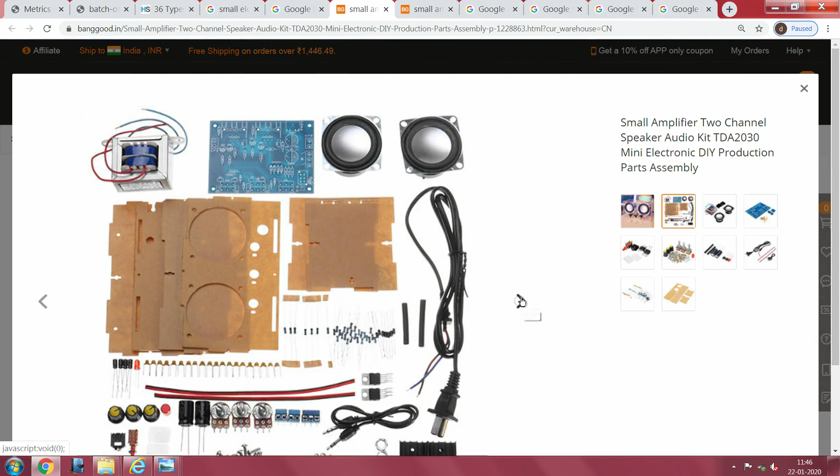The common thing about them is that invariably you will have some sort of rotary controls, and this probably is just a switch, and then you have some other types of outputs. At one extreme you can have loudspeakers. So, typically, many of what we thought was a fairly easy, simple thing, small equipment does have all these things.

You see that most important here is we have these 3 rotary controls. This is what I kept on referring to as those things which we need on the front panel. So, if you go to any design and the way the front panels are organized, which is called control panel organization, a lot of stress is given on how to arrange these components.

Now, look back again, this is the electromechanical part which you need to include in all our endeavors, and these are the visible things outside. Can you see here? We have these 3 potentiometers outside, and you will notice that except for a very small amount of electronic components, you have a printed wiring board, then a few other things, and other things are borderline mechanical items.

And whether you like it or not, there is a large number of fastening devices here. These fasteners hold together various things here. Then these fasteners are the ones that will take the control elements to be fixed properly. And then we have borderline things, an input output device which is related to this. Then we have an on off switch. Then you see here, all these things are actually mechanically fabricated.

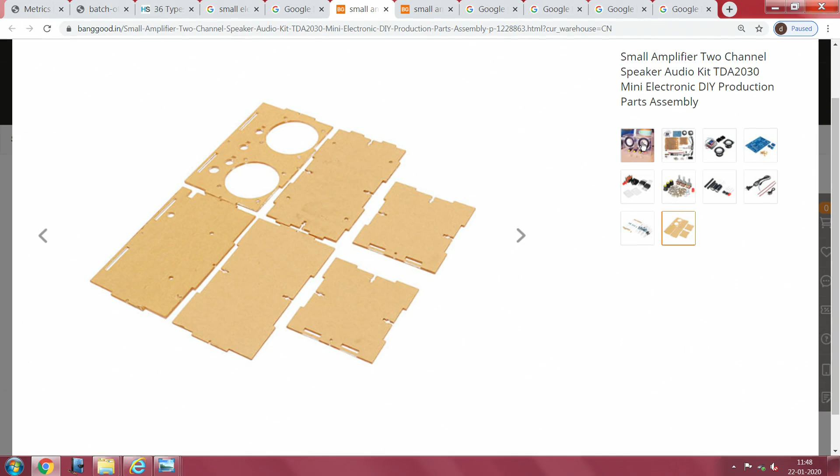So, if I now go to this, I am sure you know what it is. It is nothing but an acrylic sheet that has probably been cut using a laser. The advantage of using a laser cutting device is you have to make a proper drawing once, and you can always scale them up, and the way these parts interact. If you see my final drawing again, everything goes and intersects into the other one here. Because the sheets are thick and to make things affordable, they have added a large set of fastening devices here.

So, if you go to this picture, you will probably see all the devices that require openings and special types of things for you to include in your drawing. You have seen this? This is not fully mechanical, neither is it electronic. It is that small thing between those two which will make product detailing and implementation. Even for product design, there are several industrial design websites which will give you the outside form, and they even give you a simple exploded view.

But then when you actually want to fabricate it, you will end up with a large set of fasteners and various things which need to be assembled, and then you even have a small switch here which is not easy. You see here, this is the on off switch I was trying to tell you. The previous thing, the small red button, goes here.

And here is where you need to take a proper call, and how it goes on a PCB. You have seen this. This is the printed circuit board. One of the first things you will notice on the printed circuit board is there is a mask here. Loosely it is called a silk screen mask, and outlines of all the devices which need to be fixed are all kept there. So, when you go here, you will know where this goes. This 3-pin device probably goes here.

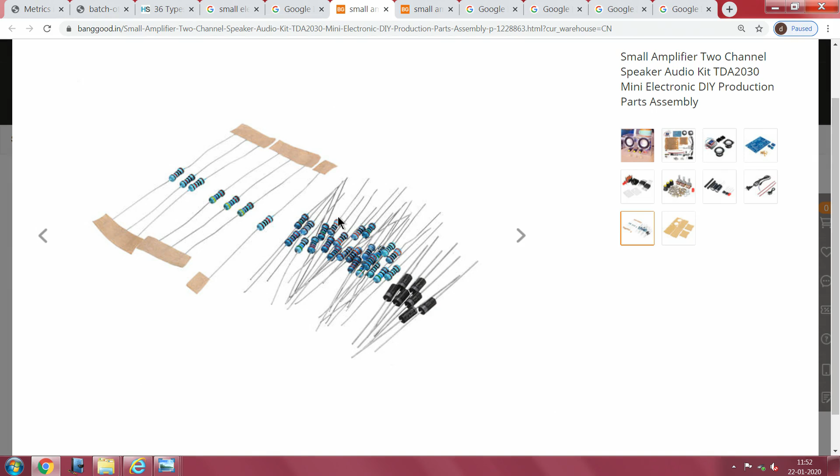Now, intentionally I have picked an older thing, so that you can see this is called lead-in-hole, old technology as compared to surface mount. Surface mount usually involves a slightly different thing and not at the hobby level. In the case of surface mount, things come in a very large level. And now, you see these interesting things, these are bulky, heavy, and they require special attention. In this case, these two things are related to this.

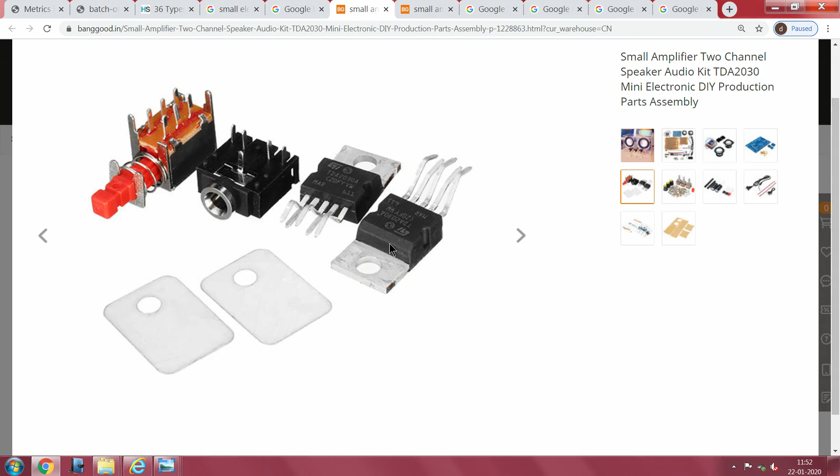You have seen these transistors, and you see how the leads have got offset, and you see this small insulating thing, and this thing gets fixed on these heat sinks. So, they are important, because in the basic simple circuit diagram, very rarely the heat part of it is shown, and all of these old things end up having a transformer for the power supply.

Of late, things are becoming slightly different, because you do have SMPS power supplies which directly convert your mains, and usually most SMPS are now rated from 90 volts all the way to 270 volts, so that both 110 as well as 220, 230 power supplies are covered. In other cases, if you have a wire which enters into the enclosure, you have a small detail called the grommet there.

This grommet ensures that the wires do not get wrenched off. It holds the wire in place, grips the wire and also makes sure that the wire does not get abraded by constant flex. And then you have other types of internal connections. So, I think that is about all that I have managed to cover in this. I will now close this and go back to the original. You see here, once everything is closed, you are not likely to notice anything in this.

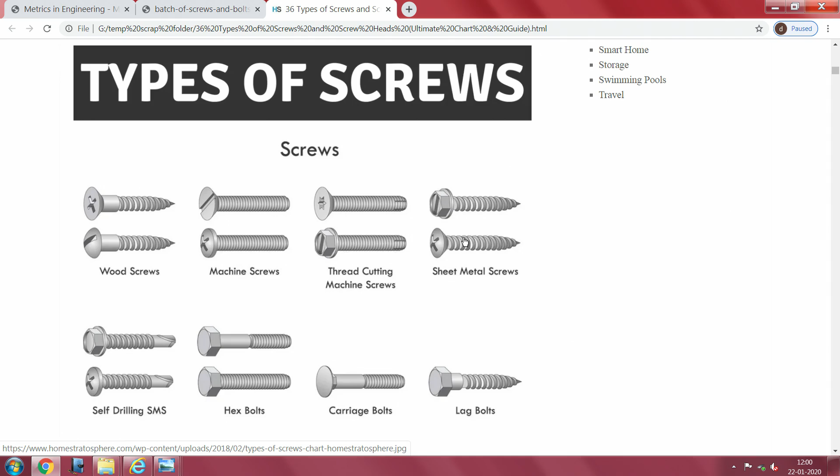Everything is held together by these screws everywhere. You have seen there are just too many of them, saying the screw heads are different, the thread form is different, the pitch is different, and some of them have an unthreaded portion. Then you have the sheet metal screws, it's a never ending thing, they are all self tapping and a little more load bearing.

This is where we come into the very ubiquitous and confusing type of things. You have a very simple countersunk screw, then oval, then pan head, and various other options. This is about the basic head itself, and after that you have things like hexagonal with washer, and slotted washer and so on. The thing is never ending.

This is another interesting thing, I'm sure you would have found and felt frustrated sometimes, saying you think you have the proper screw and you think you have the proper device to unscrew it. Now you will suddenly notice you have so many things. You have a simple straight one here, you have a Phillips, and then a one way thing. Most irritating is the way they have made it, you can assemble things, but the other way there is a ramp-like thing and you cannot take it out. And we have Torx things, and the way the proportions have been adjusted, an ordinary screwdriver may or may not allow you to take it in.

Now we come to this large number of washers. A washer is used for several purposes. One of the simple flat washers is meant for just spreading the amount of force, so while you turn, the head should not score off the basic raw material. And we have the other two things: internal lock washer, external lock washer. Then we have a split lock washer, and an equally large number of, I won't call it confusion, a large number of screws and matching nuts which go with it.

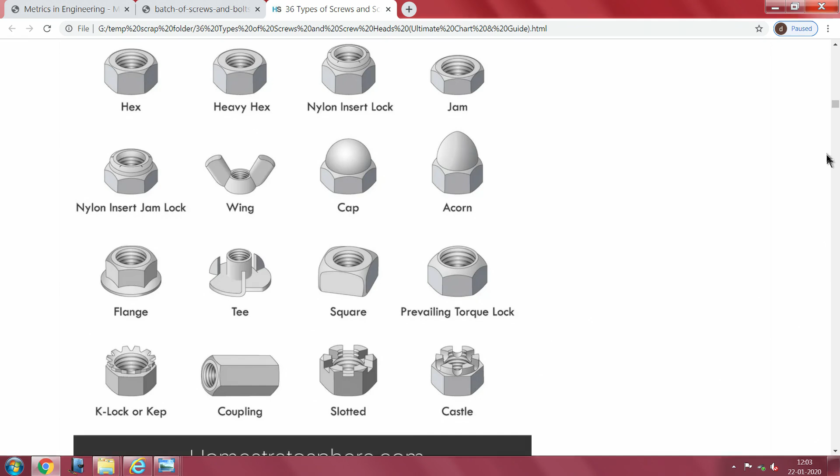Some places you can always hide the screw head by using a countersunk screw. Then what about the tail of the thread on the other side? These things are made such that the other side can be hidden. This depth is a little less, this depth is a little more. Equally, I'm sure you would have seen these two things, this is a castle or castellated nut, and these are slotted. I'm sure you would have seen all this stuff in any of your automobile things.

In the case of our cars and similar applications, we have this component, and they usually have a cotter pin which ensures that the corresponding male thread inside has an opening. If you open it without removing the cotter pin, you cannot open these things. So there are certain advantages with both designs.

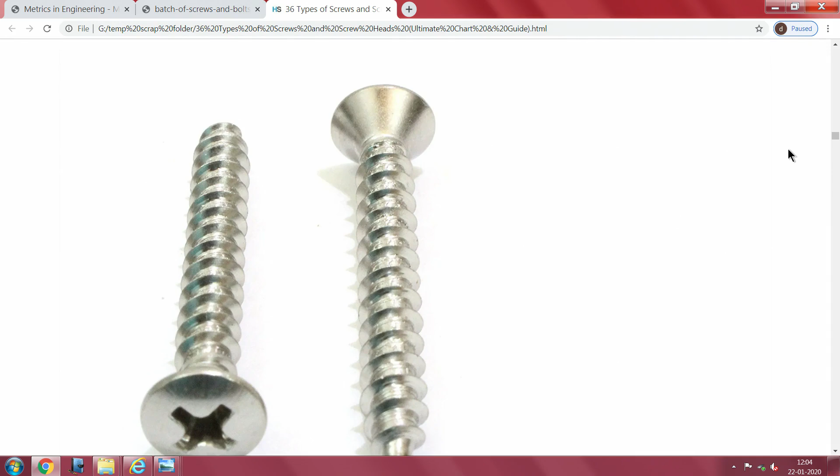If you go down further, this shows a lot about how to operate the screw heads and how these things have been made. It's a very long topic, so I want you to go there and check it yourself. For now, I will close this and present the next part.

We now come to saying what does all this have to do with our engineering. The idea is that you need to create these elements in your design.

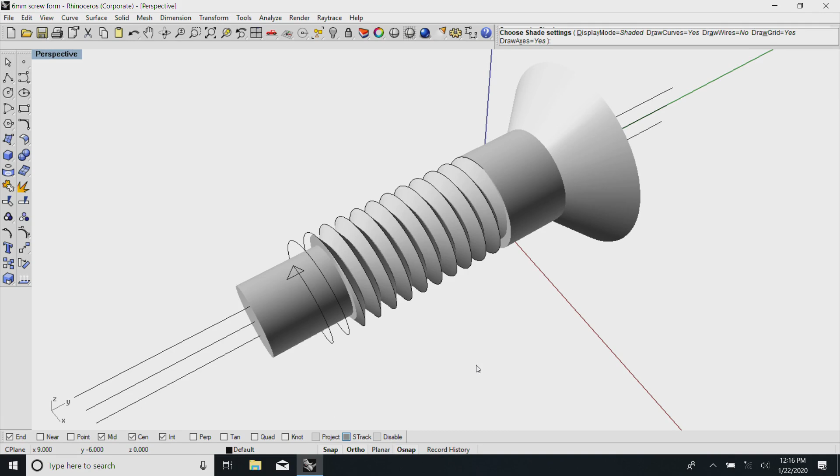If you look at my other monitor, you see here this is a thread form or screw form I created, which I started yesterday. You remember here I intentionally made this part separate, this thread.

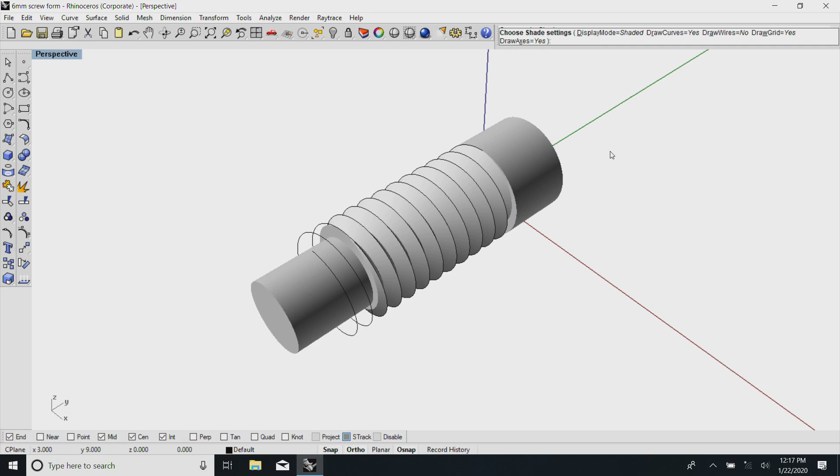A lot of attention has been made to make this correctly. You have seen this - this is the basic thread, and this cylinder represents the root diameter, this cylinder represents the outside diameter, and the pitch and all have been very carefully made based on this data.

Data for this, the pitch and diameter and all, is available from engineering manuals, and occasionally you can get all these things from engineering data books.

But once you create a device like this, proportions are maintained. In this case, this is 6 mm by 1 mm, which I had spoken to you about earlier, if you remember.

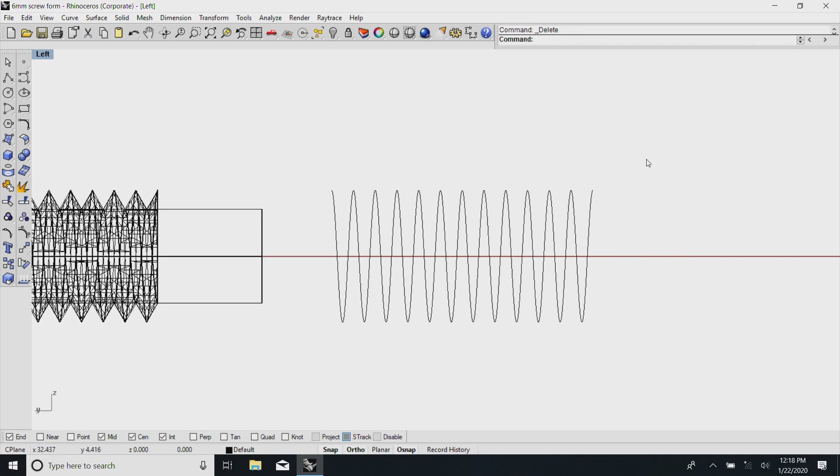See, that is 6 mm, and if you see the pitch, it is 1 mm. These are the metric standard.

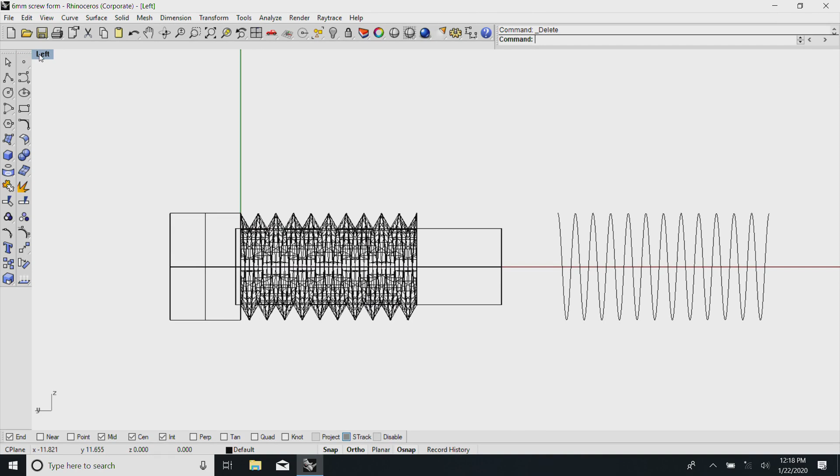Besides, our interest is not just creating these threads - our interest is to create the various thread forms and various things with which we can manage things. So what I wanted to get to with you is saying, sometimes you create these unique things.

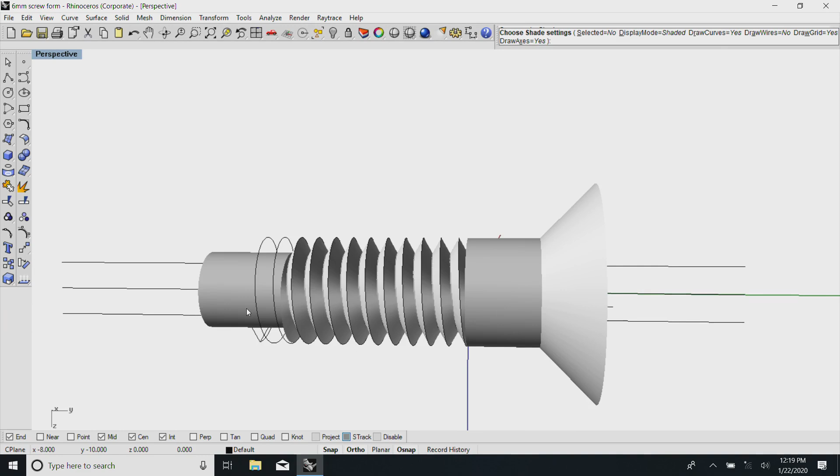Like I have the basic thread, then I have the basic screw head. From here we can manage and play around with these things as we like, including the close locating hole versus the loose locating hole, and in this case this has been made for various things, including how it enters another place.

Now, anytime you want to make anything of your choice - let's say I need to create a hexagonal head - all I need to do is make a hexagonal solid. I will try to make it. Please be patient with me.

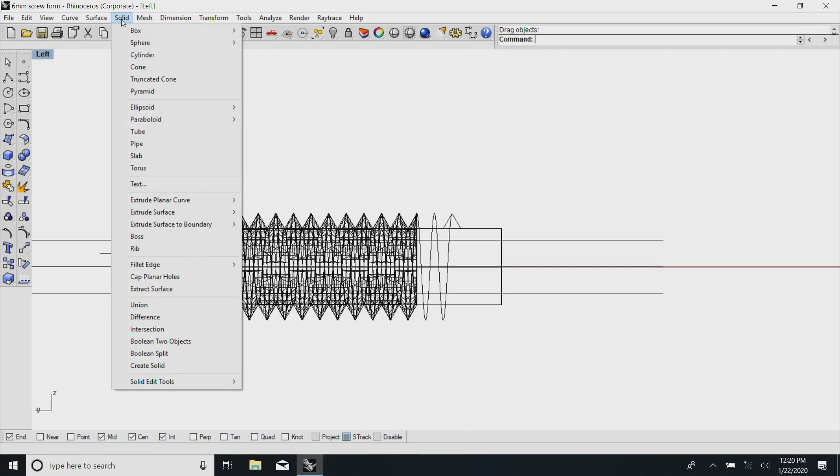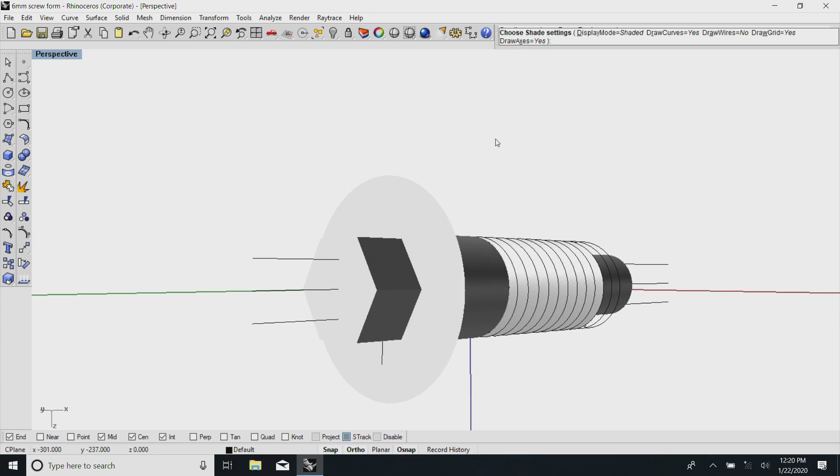Say I have just created the necessary proportion. This proportion - everything depends on how well I follow the basic proportions given in the engineering manuals. So I have an advantage, in case I want to make a hexagonal headed fastener, I can use this as a hexagonal head, and this hexagonal head can be attached to something I need to create.

In this particular instance, I just wanted to show you how to create - out of the basic information I have collected, I have been able to already create an Allen bolt.

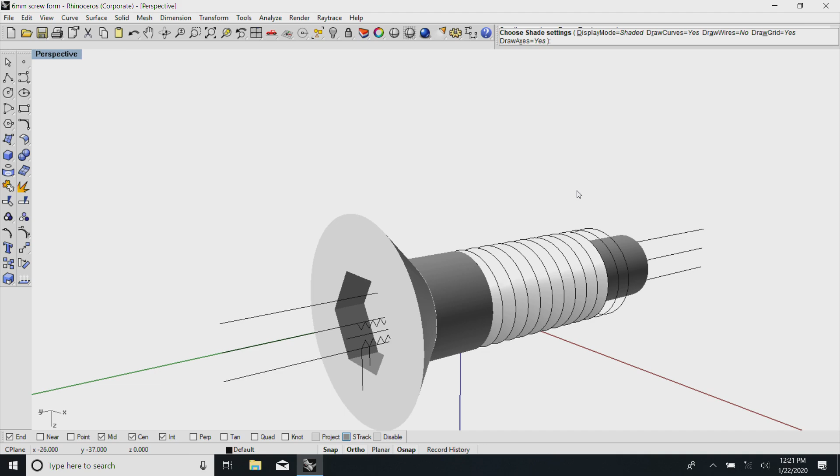So it is easy. You see, all the time I have just created only one instance of this, but the way this has been created, this thread is different - I can make it longer or shorter.

And then occasionally with screw threads, if you see here, there is no issue with the normal standard heads and this thing.

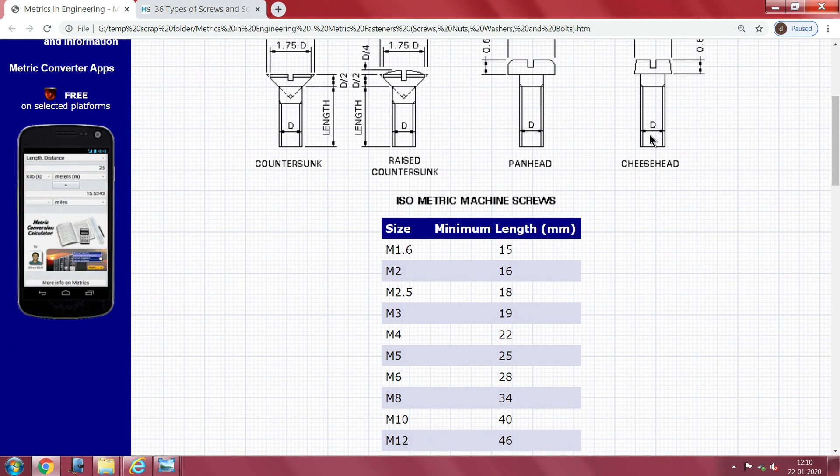So we have the size and the minimum lengths, and as we come to slightly stronger socket screws which are meant usually for something to be made in the workshop, I have just now shown you how to create this.

You have seen this is exactly what I have created, except that in this case it is small. They have shown this is 2 times the diameter, and you have all the diameters here. I have started directly with this M6 into 16.

Now you see here on a circle this is there, and most importantly, what you notice is in the case of these high strength screws, very rarely does the threaded portion go all the way up to the head, because that leads to stress concentration and failure, and besides you do not need threading on that.

So all these things are probably cold forged - I do not know the exact process - or heat treated, and afterwards eventually this thread forming is done.

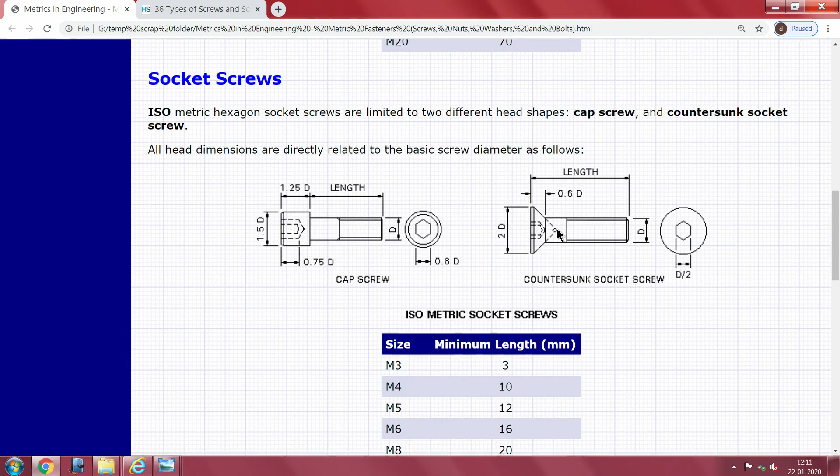So, if I make this generic device like this, I can add any screw head I want, and as we go down, the same thing can be used for all these screw heads, washers, and metric bolts.

This is what I had shown you earlier. I had made a hexagonal thing. If I play with these proportions, or rather adjust these proportions, I can attach the other side of the remaining fastener.

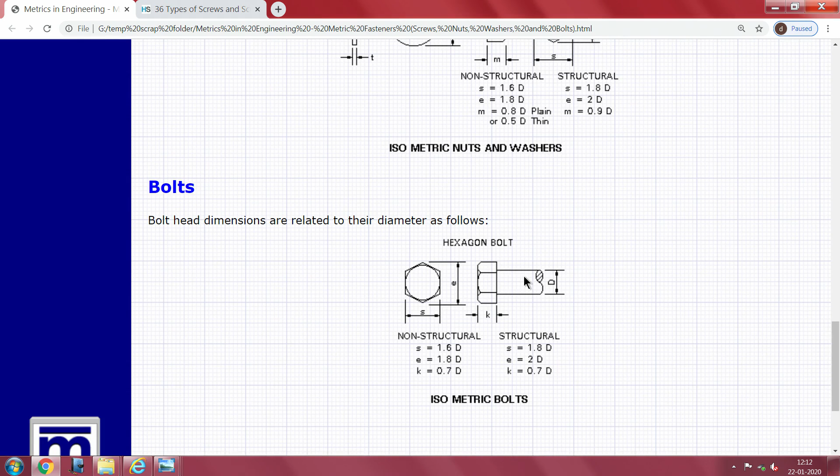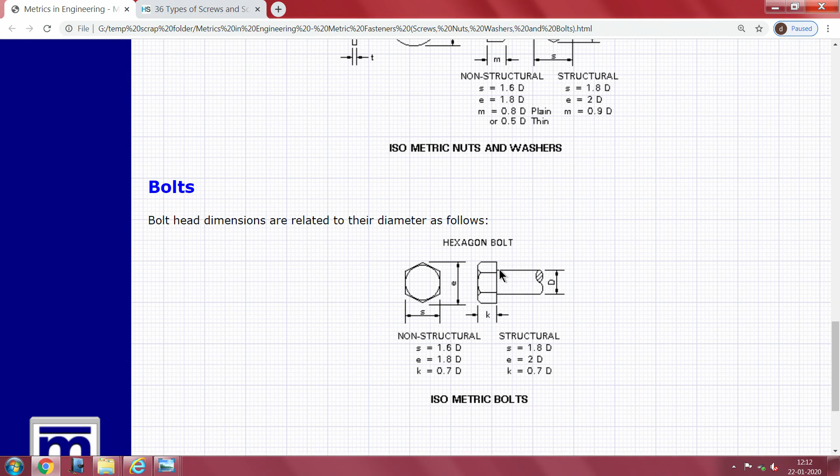What I just wanted to show you at this point is, the issue is not about how to learn all these things, but the issue is about saying now related to this. So, we will get back to this other monitor.

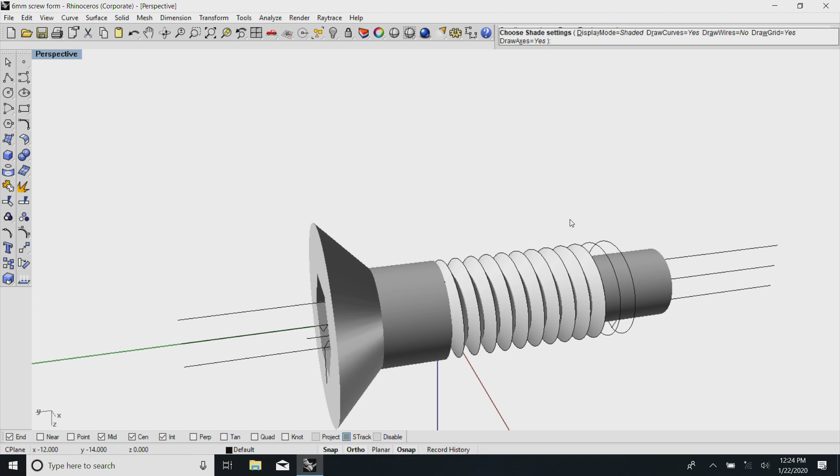If I somehow make that old layered drawing and show a closed locating hole, then I show a different loose locating hole, and also add the other nut portion of it. It can be a free running nut, alternatively it can be riveted nut. All these things can easily be produced and kept here, and we can carry this as a...

You see here I have this. Now I will see if I can make a nut out of it. So the easiest thing for me is, for example, I will take and try to one more time make a solid out of a planar curve.

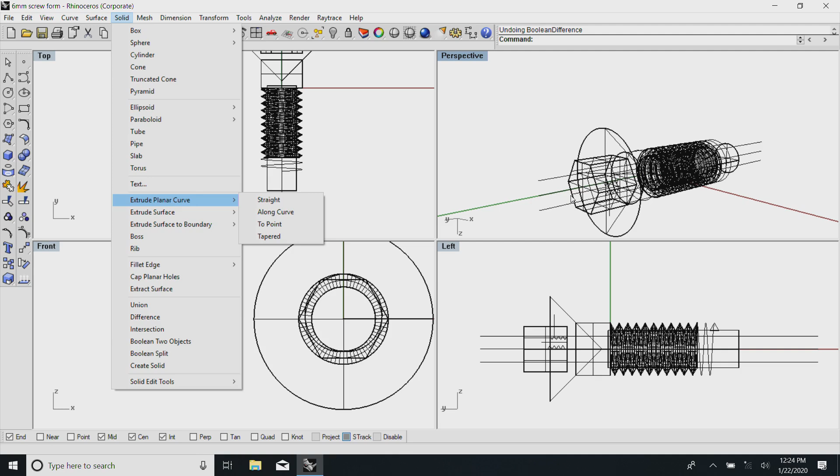I will just do the simpler way. I will just try to scale it up. So what started as a screw head there, suddenly now I can make it into a nut which goes here.

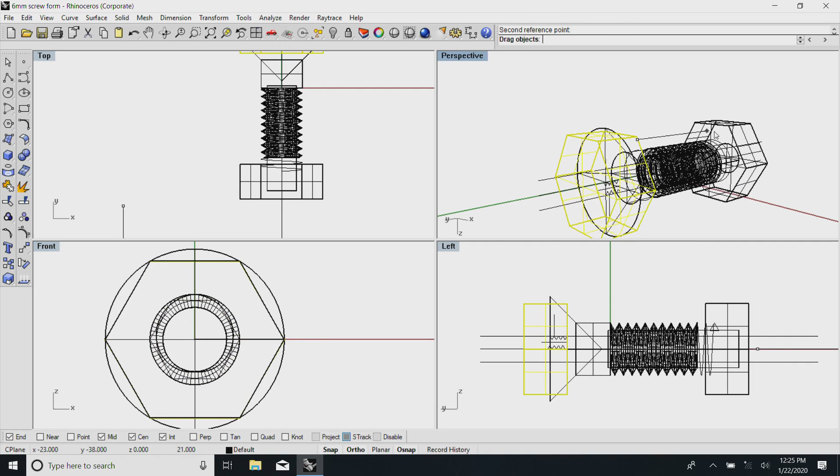And at this point, this I wanted to show you, have the screw thread here. I just need to...

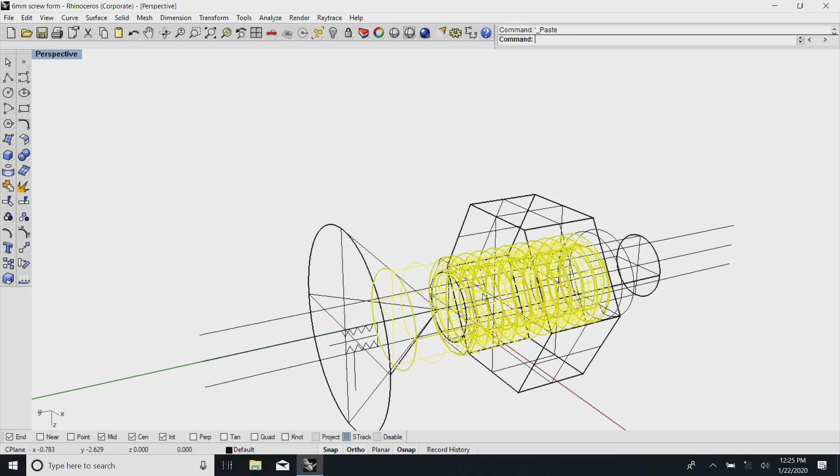You see here, this is the old threaded portion of it, and this was a very long threaded item. So now what I will do is I will see whether I can make a Boolean difference and whether it will work.

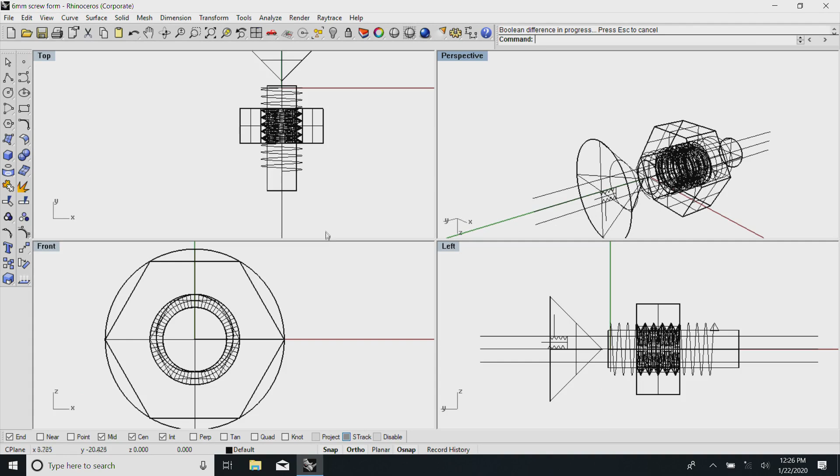Most of the time it will work. Surprise, I have a beautiful nut which works here now. Can you see here?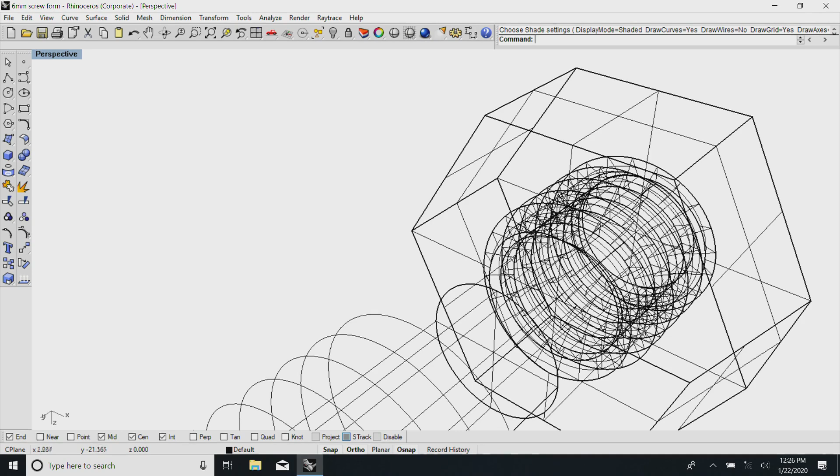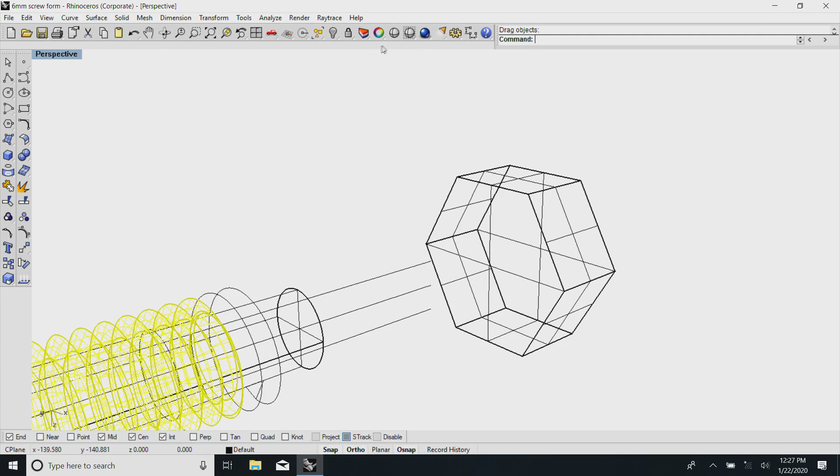Possible for me to create... I will explode it for a while and just see if...

The surface got exploded very unintentionally. So, I will just remove, I need to delete several of the unwanted features.

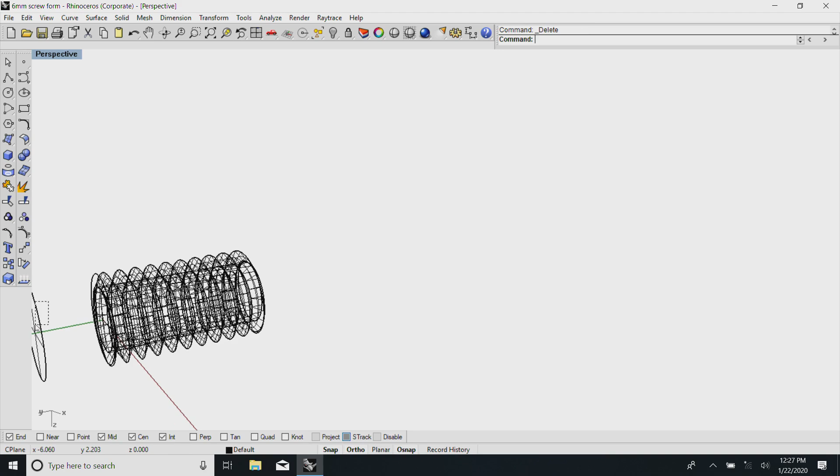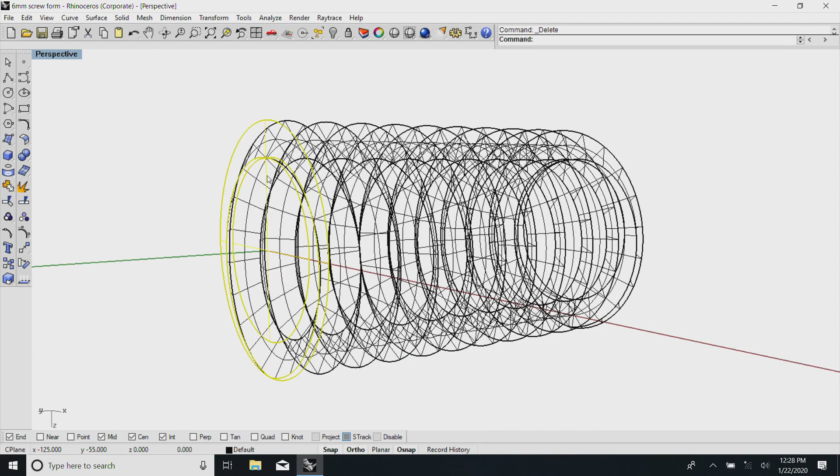So if I now have this basic thread-like device, I can just go around carrying on with this. You see this, I have this thread, and if I now try to subtract it with the other thing...

Only one instance I need to make a thread, afterwards I just need to keep this and keep doing with the various other things.

So in this case what I wanted to show you was how to create the first fastener, and the key element in the fastener is the thread portion, and it has been made into 3 portions: how to make the head separately, how to make the thread, how to make the shank, and from this we can generate all other things. So I will continue next time with trying to show how and where all these things are there.

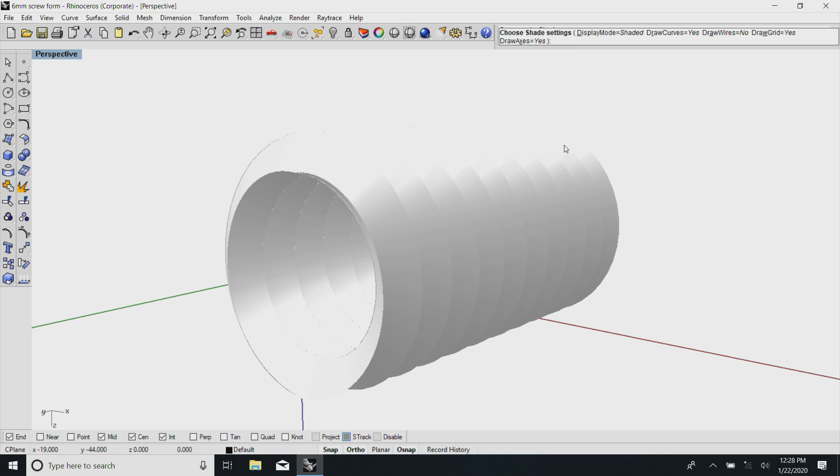Now, you see this monitor, you have seen here, an unbelievable amount of things are available like this, all of this can be created easily.

And the issue is, in the case of these patented fasteners which you get from outside, you probably do not need to create any of these things, you just need an equivalent cylinder and the detail on how to create the matching part. If you need a countersunk portion, you need to make this like this, and if you Boolean from the other thing, you have everything you wanted to create, it is available for you as a library component.

So I will take leave of you here. I suggest you go to the internet, check around for how many of these types of screws are there which are useful for you, how to make this screw head shape, and so on. Just look this up randomly, you will get hits.

This is what I was trying to tell you about. Normal screw heads all have 90 degrees, and you require this special countersunk screw head type of drill bit to make sure that you get a 90-degree thing. Most drill bits have 118 degrees. So a 90-degree device will not go into the 118 degrees.